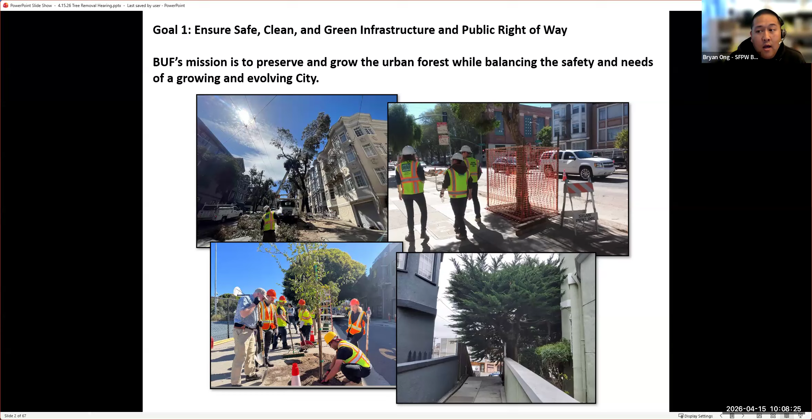So this is Street Tree SF. It's basically our $19 million annual set aside from the city's general fund for Street Tree SF. We had a census completed in 2016, used to create priorities and a routine proactive tree pruning schedule for the city's 125,000 trees.

So you can go to our website and see when your tree has been pruned, when it is upcoming, and what has been completed in the city. This is pretty much what we've completed in the city, shown in gray. What we're doing this fiscal year is shown in green, and the next fiscal year is shown in dark green.

So a tree ordinance establishes authorization and standards for addressing a wide range of issues regarding trees. San Francisco's urban forestry ordinance is codified under Article 16 of the Public Works Code. Basically, a removal permit is required to remove street trees, significant trees, and landmark trees.

Some important updates from February 2022: if the department is removing a tree, a replacement is required within 120 days, or it's added and tracked on a delayed replacement tree report. If a tree cannot be planted in situ, it must be replanted at a nearby location. If a property owner or applicant is granted a removal permit for a healthy tree, the department shall require a replacement street tree of equivalent value or impose an in-lieu fee.

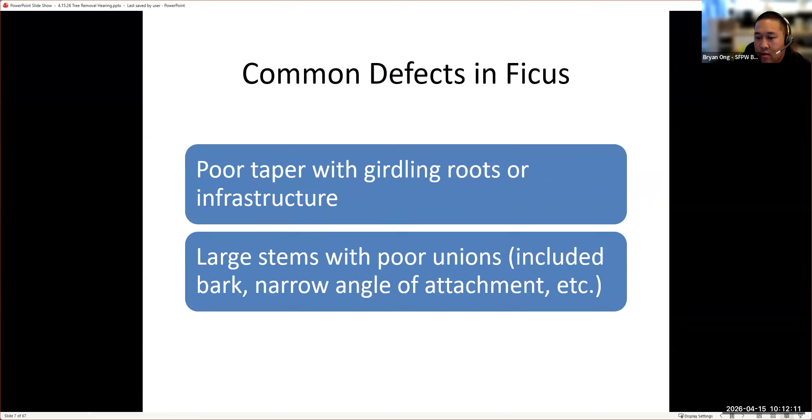So, some common defects in ficus: in general, poor taper with girdling roots or infrastructure damage, large stems with poor unions, included bark, and narrow angles of attachment. Here are some examples of poor taper with girdling roots or infrastructure, and some other large ficus that have been damaged with large stems and poor unions.

Okay, so to start our hearing, order number 212741. This is for 699 Rhode Island Street. This is to consider the removal of one street tree without replacement adjacent to 699 Rhode Island Street. Staff has denied the removal and the applicant has appealed.

So this is the subject tree. It's a Platanus, London plane, at 699 Rhode Island Street. The tree is about 20 feet tall, with a DBH diameter of about 9 inches. The tree is in fair condition, with no deficiencies in structural health or other health issues other than a slight lean due to shade from the adjacent tree.

The tree was proposed to be removed in order to install a curb ramp at this site - just a curb ramp that needs to be installed at this location. So the city has denied the removal, and the plans indicate the location of the curb ramp, but do not indicate why a bulb-out or other modifications can be made to retain the healthy tree that can't be replaced.

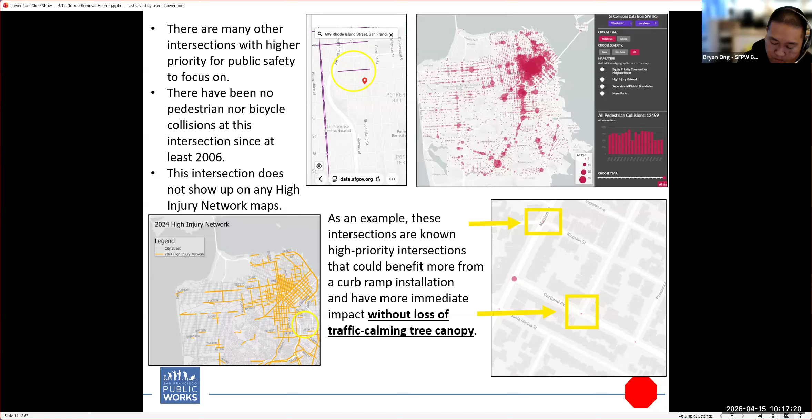Okay, thank you. May I have the applicant speak on this? Mr. Jensen?

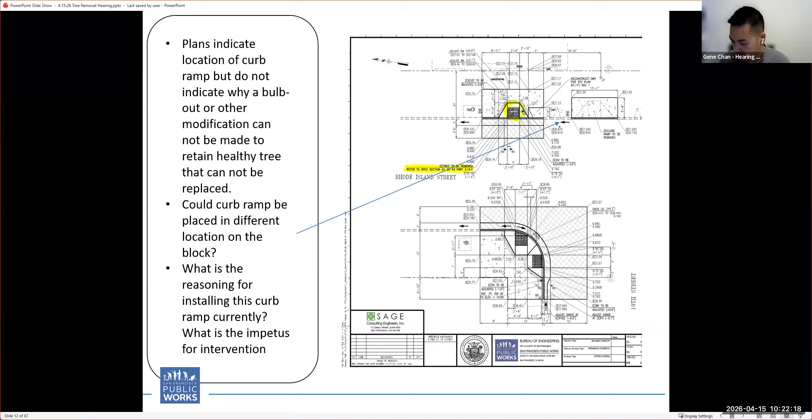I'm also a certified access specialist, meaning certified to talk about accessibility in built environments by the California Division of the State Architect. I've worked on dozens of Title II entities, transition and self-evaluation plans. Just for context, I'm not making this about civil rights, I'm very familiar with what that all entails.

It's striking that the department notes there hasn't been a thorough explanation of different locations and alternative designs, and that this is not a high priority on the city's high injury network. There's a reason it's not a high priority: people don't actually cross here. The reason you don't cross here is because there's no stop sign at this intersection. It's on a hill, cars coming up have low visibility, and cars going down are flying through this intersection.

I know this because this intersection is a few blocks from my house. I'm not usually this blunt in public comment, but this crosswalk is dumb. There are so many intersections around this neighborhood where I feel like I'm taking my life in my hands, and this is not one of them. It's not even close. I can't even think of a time or reason anyone traversing up or down Rhode Island on these two blocks would try to cross at this intersection.

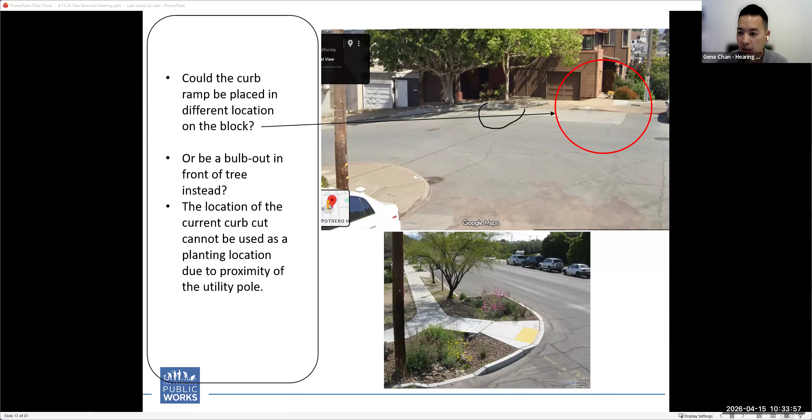All right, I have no other questions, so I will go ahead and close this item, and I will make my recommendations to the director. Next item.

This is Brian Ong, San Francisco Urban Forestry. This is for order number 212740.

This is for 1756 Buchanan Street, basically the Buchanan Mall, Osaka Way. This is to consider the removal of 24 street trees with replacement of 23 street trees adjacent to 1700 to 1756 Buchanan Street, the Buchanan Mall, Osaka Way. The staff has approved the removals and the public has protested.

So this is the reconstruction of the Buchanan Mall, Osaka Way corridor. They're going to be redoing and reconstructing this corridor, regrading to make it more ADA accessible.

So this is just the site plan of what it looks like with the new trees being installed. The trees will be replaced with larger stature trees.

It'll be a ginkgo biloba Fairmont, and then the prunus yedoensis akebono. Both of these trees will get to about 20 to maybe 30 feet tall.

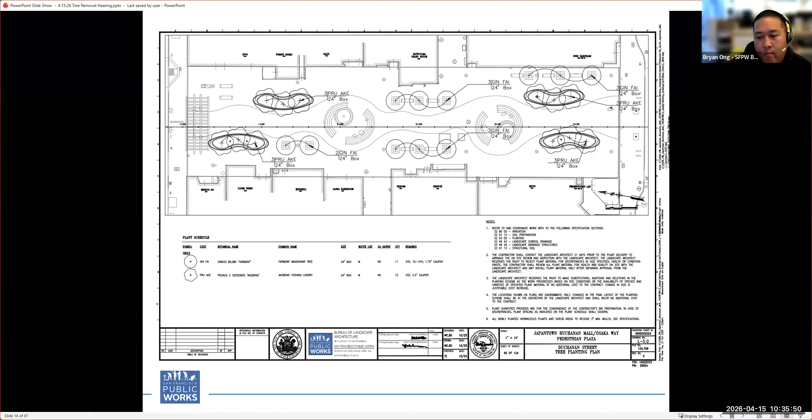All the trees that exist in the corridor are small stature trees. They're all less than 10 feet tall, maybe one is 12 feet, but they're all less than 10 feet tall. So the replacement trees will be larger stature trees in the future.

Now I'll show you the trees, what they look like now. This is the first site, there's 24 trees, they're basically almost all the same. About half of them are in poor condition, and half of them are in fair condition.

The reconstruction of the Buchanan Mall, Osaka Way is for improvements to ADA accessibility, and regrading. They're going to be regrading the entire corridor, which will cut major roots and destabilize trees. They're going to be redoing all the utilities in the corridor, so basically 23 out of the 24 trees can be replaced.

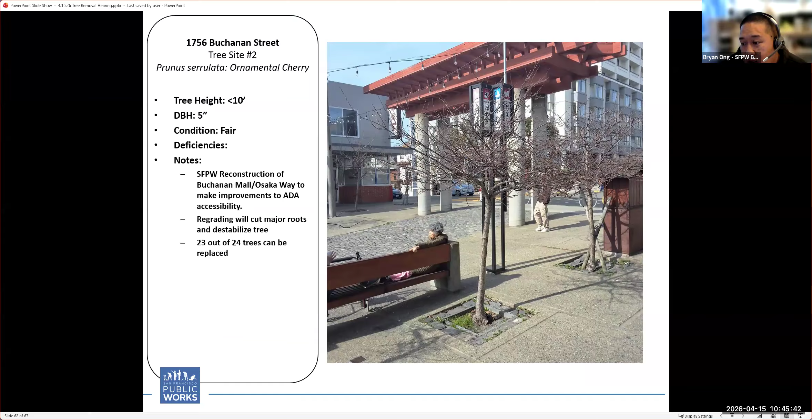This is 1756 tree site number 2. Tree height is less than 10 feet tall, fair condition. Here's another photo.

This is 1756 tree site number 3, less than 10 feet, 5 inches in diameter, fair condition. Another photo. And then this is the last tree, 1756 tree site number 4.

So most of these trees are maybe 10, 15 plus years old in this area, and they're all less than 10 feet tall. They're all in the way as you're walking by - I hit my head and face multiple times just trying to walk by and take photos.

What the project is going to do is remove and excavate everything, then redo the entire corridor, planting new, larger stature trees that will grow taller for clearance issues. So to be consistent with how we deal with similar cases, SF Public Works Bureau of Urban Forestry has approved the removal of the 24 trees and replacement with 23.

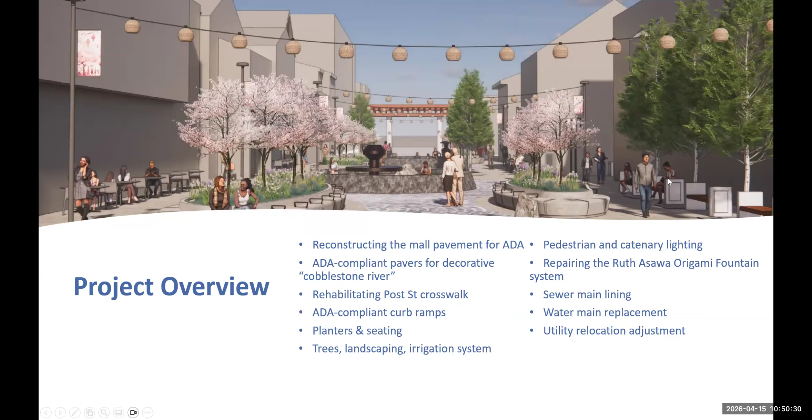On top here is just a rendering of what the space will look like after the project is finished, and this is also a top-down view of the space. As I mentioned, we'll be constructing these new planters with seating around the edges, along with planting the ginkgos and the tree wells separate from that.

There was a strong desire from the community to see additional landscaping plants as well as seating. As Brian did a great job going through, the community considers the health of the trees to be in pretty poor condition, with stunted growth. Whether it was how they were planted, the amount of soil, or other conditions, it basically just didn't give them an opportunity to grow well. With this, the planters and tree wells we'll be constructing will have significantly more soil and a much better chance of growth.

As Brian was saying, all the trees are basically under 10 feet tall, probably closer to 6 feet, so the actual growth of the trees should be closer to 20 feet or higher. With the planting of the ginkgos, that was a strong request from the community, also to add some height and color variation with seasonality.

The space itself feels very large. It's basically a street without the actual pavement. But as you can see with the cobblestone river running down it, with the fountains and seating wall area, that's part of the Ruth Asawa's artistic intention.

The amount of space that we're able to plant is much more confined to the edges. We're also dealing with a number of underground utilities. And of course, one of the biggest fixes of the space is fixing a number of ADA issues, which includes accessible business entries, accessible path of travel. And then, of course, we wanted the trees to actually have space to grow.

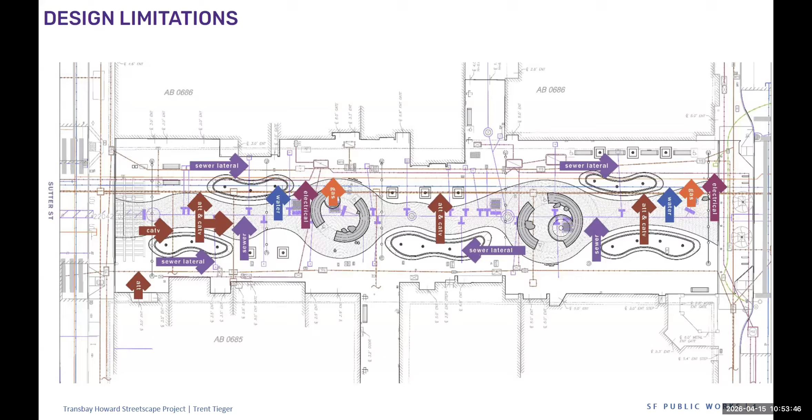Sorry, I was on mute. Trent, was that all? Did you have any other design criteria you wanted to talk about? No, I think I had all the key points, and just again highlighting the trees themselves are in poor to fair condition, but the stunted growth really doesn't give them an opportunity, and as most of the community may know, we're in the cherry blossom festival season right now. So the hope is that once this project is completed and the new trees are in, they'll actually have a much better cherry blossom season. Yeah, thank you, okay, thanks.

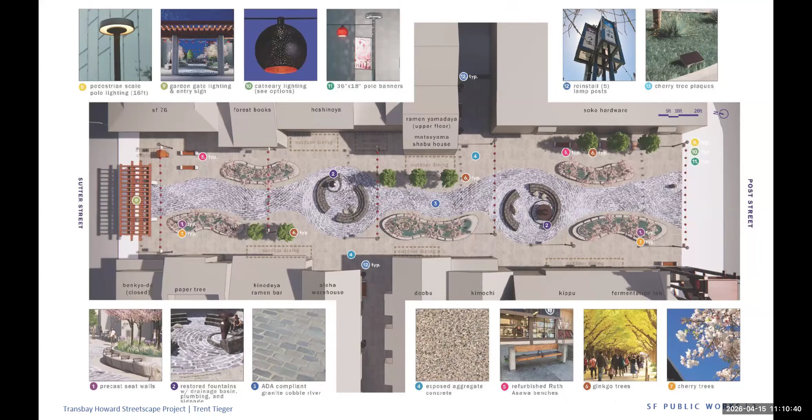Okay, if you can talk to the landscape architect to see what we can do to mitigate that, maybe use of DG, I don't know if that would be appropriate. Yeah, I'll talk with them about what the design intention was. I want to say there was some element of that for the tree well, whether it was DG or some other rocky fines that would go on top to help prevent soil washout.

Okay, and Brian, we don't use tree grates anymore, right? Brian Ong, San Francisco Urban Forestry. In certain areas I accept them, like downtown San Francisco, FiDi, just because there's so much traffic, but typically no, we don't accept tree grates. And I think because the space is so large and there's enough walking space, I don't think we need it.

Okay, how about here at 49 South Van Ness? There's tree grates, but I think the trees are sort of in the ground. Yeah, basically what happened was they put silva cells underneath the sidewalk, so it creates less compaction in the soils. I think that was one of the main parts of it. It was, again, almost an experimentation, seeing how that works with the tree grates and the silva cells.

Okay, all right, that's all the questions I had.